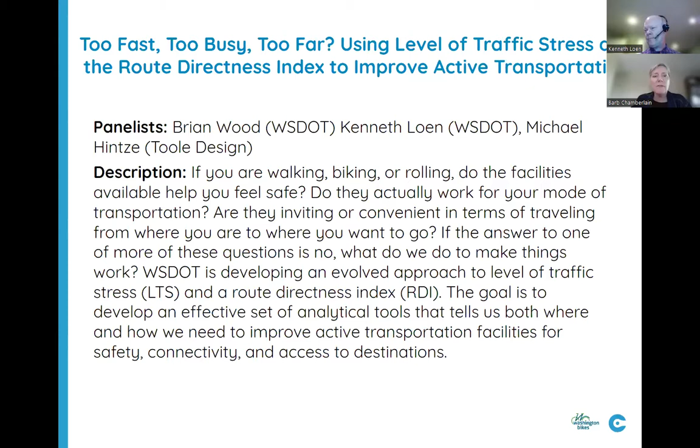In this session, if you are walking, biking, or rolling, do the facilities available help you feel safe? Do they actually work for your mode of transportation? Are they inviting or convenient in terms of traveling from where you are to where you want to go? If the answer to one or more of these questions is no, what do we do to make things work? WSDOT is developing an evolved approach to level of traffic stress, which we abbreviate as LTS, and a route directness index, RDI. The goal is to develop an effective set of analytical tools to tell us both where and how we need to improve active transportation facilities for safety, connectivity, and access to destination.

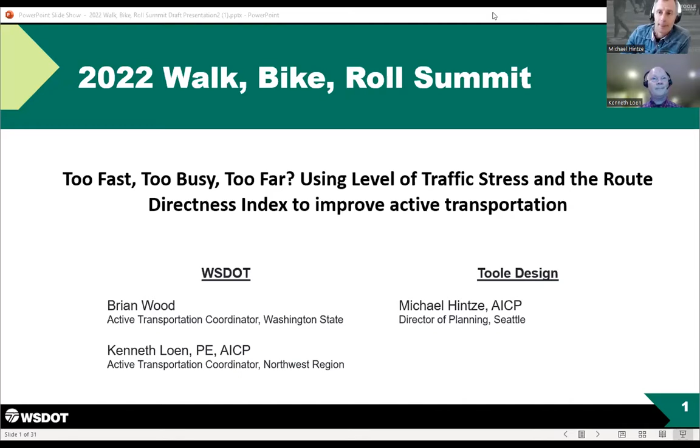So first thing to talk about is why are active transportation analysis tools needed? I know I'm somewhat preaching to the choir with the audience today, but really it boils down to it's all about the network. Any individual's willingness to use a bicycle as transportation is really related to their comfort riding on public routes. Complete routes require complete networks, and we often don't have that, so we need some tool, some method of analyzing what that looks like.

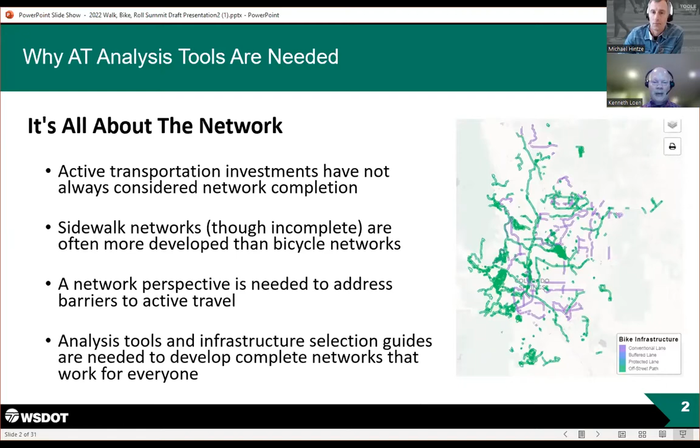Last bullet: analysis tools and infrastructure selection guides are needed to develop complete networks that work for everyone. You don't improve what you don't measure - we all know that. So we need some way to analyze and measure the active transportation networks that we are building.

Another thing to think about when considering what it means to have a complete network: it's not good enough to just look at a map and see what lines connect to other lines. That approach will often leave behind these network gaps.

So just real briefly, I want to talk about why we're thinking about level of traffic stress as an analysis tool, as opposed to other tools. I'm sure most of you, if not all, already are aware of what I'm about to say, but it's worth repeating.

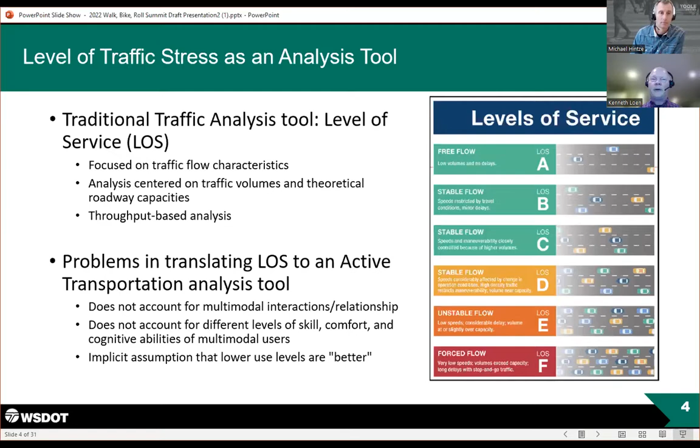Okay, LTS, as I'm sure most of you know, was a concept introduced in 2012 by Peter Furth and others in a report published by the Mineta Transportation Institute. It was intended to be a new way of analyzing bicycle facilities. I want to note that it was originally intended to analyze bicycle facilities specifically, but we'll talk more about that in a little while.

What it was really trying to analyze is the experience of the user and tying that to the quality of the facility being provided, as opposed to thinking about throughput only. So it's really more of a tolerance-based analysis and less of a throughput-based analysis like level of service.

The proposal was for four levels of traffic stress. Level of traffic stress 1 is the lowest level, a facility usable by children up through essentially everyone. Up through level of traffic stress 4, which would be usable by only very few people—realizing this was originally focused on bicycle facilities, this would be a high-speed, high-volume roadway with no bicycle facilities, where the only person who would ride their bike there is someone extremely confident.

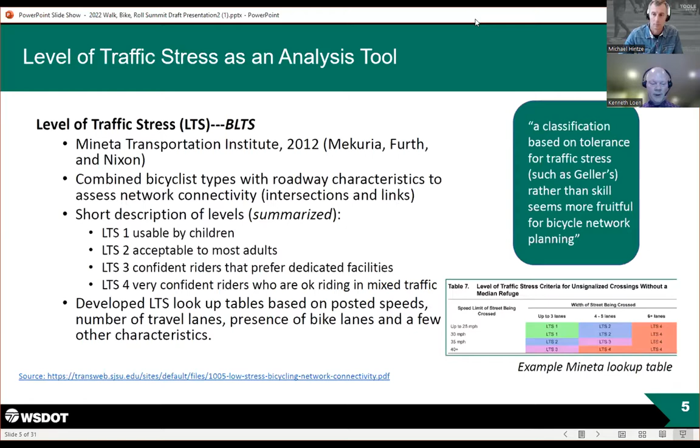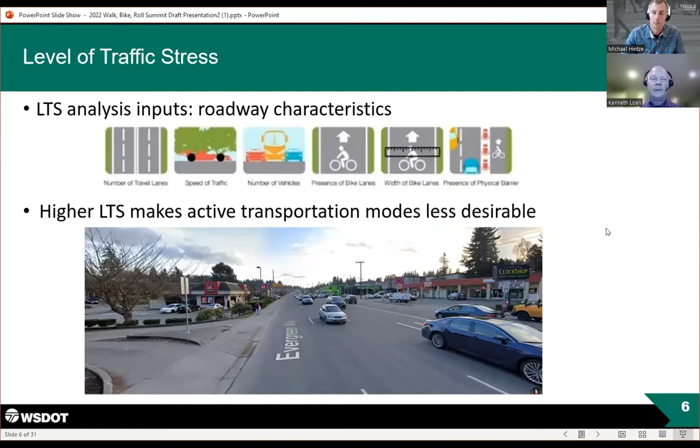Just expounding on that idea a little bit.

Overarching everything we're doing, this all falls under the umbrella of the safe system approach, which I think Michael will touch on a little bit later.

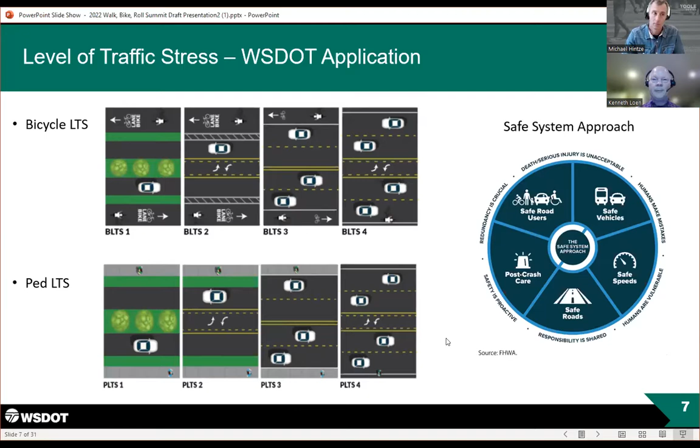I do want to mention, if you haven't read it already, WSDOT's new active transportation plan, as of last year, did introduce the level of traffic stress at the statewide level as a means of evaluating roadways.

The intent for LTS analysis is to replace user count data to guide decisions about transportation facilities. Traditionally, we've tended to look at user counts, so higher user count areas would get facility improvements. Obviously, that is not necessarily the best approach. So now we're looking at the entire network and looking at high LTS locations and how we can address those problems.

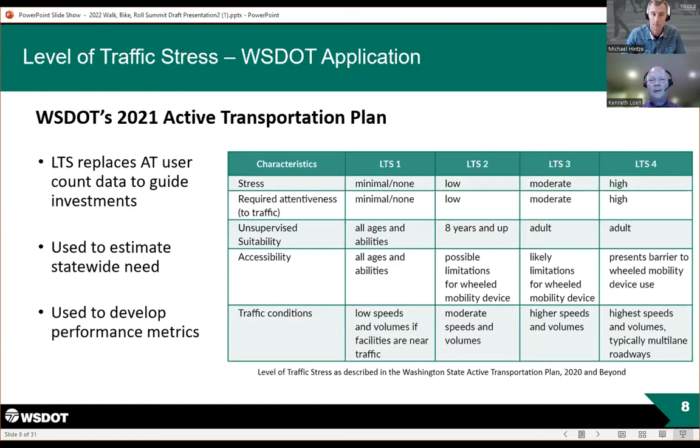LTS analysis is also being developed at the statewide level, so we're looking at the entire system. Brian's going to touch on that a little bit. And our performance metrics and ways of measuring success for our active transportation elements are all tied to the active transportation plan now as well. With that, I'll pass it to Brian.

Thank you, Kenneth. Can everybody hear me okay? Kenneth gave us a nice introduction to LTS, and a second analysis tool WSDOT looked at was route directness. Highways can act as barriers to active travelers, similar to rivers, and crossing locations represent points where the highways are permeable to travel. WSDOT published the multimodal permeability pilot that examined out-of-direction travel, developed route directness index data in GIS, and suggested ways to use RDI data to develop performance metrics.

Like LTS, data limitations were a barrier, but GIS-based route directness has value when asking high-level questions. RDI is a way of comparing the out-of-direction travel for different routes, rather than just comparing the travel distances of those routes. An RDI of 1 means you can walk directly to your destination. An RDI of 2 means it's twice as far as a direct path, which takes twice the time, twice the physical energy, and twice the exposure to weather and other conditions.

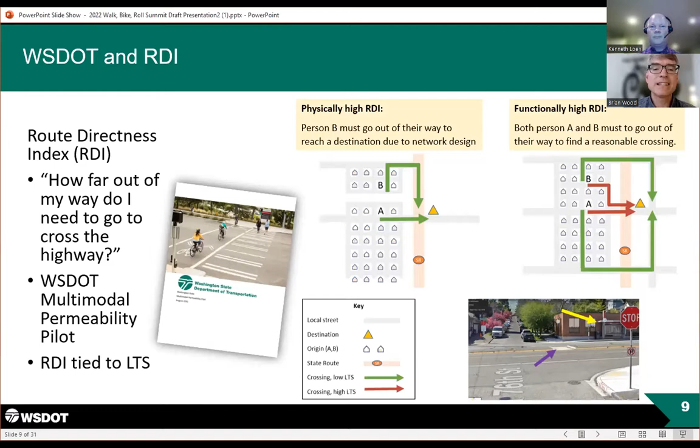These illustrations show that barriers can be physical or functional. In the first illustration, a physically high RDI is shown for traveler B. The second illustration shows a functionally high RDI situation. Neither traveler A nor B has a low level of traffic stress crossing that would enable direct travel via the roadway network. The image shows such a crossing on State Route 99 that leads to a major bus stop. There's a median island which offers some protection for confident pedestrians, but this high-speed, high-volume roadway is not low LTS.

Most people who are familiar with LTS would say it is a GIS tool, and WSDOT has developed state highway LTS layers for GIS, but it's important to recognize that such layers only offer a high-level view of our highways. They are based on very limited data. Such data is valuable when the questions are broad, such as whether we see more crashes in places where the LTS or RDI values are higher.

That kind of information, combined with other data layers, could help us distribute program funding in as equitable a manner as possible. But it won't tell you what to do where, and it won't capture many of the concerns that a walk down the street will reveal. Because of those limitations, WSDOT is trying to develop a manually applied method for capturing LTS and RDI information. Manual methods can see concerning factors such as high volume driveways and large curb radii. They can also see positive factors such as bulb outs and rapid flashing beacons that currently don't show up in GIS data.

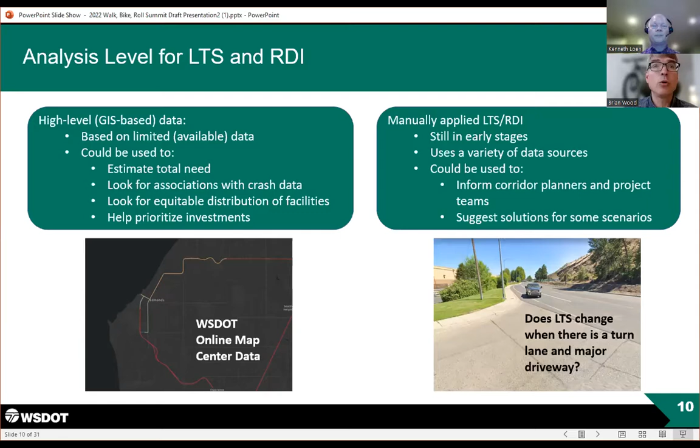A GIS layer titled Active Transportation Data Level of Traffic Stress is now available online through WSDOT's online map center to everybody who wants to go there. The layer is based on the general level of traffic stress lookup table shown on this slide. The layer brings up a map of Washington State where all state highways are color-coded according to LTS. At first, everything appears to be the highest level, LTS 4, color-coded red. But zooming in on a population center, there are some places where the LTS is lower.

One such location in Tacoma is shown on this slide, oriented north on the right. An LTS color key is also provided. In the screenshot, State Route 163 changes from LTS 4 to 3 to 2 and finally to 1 as it goes to the Point Defiance Ferry Terminal.

Clicking on a location on the highway brings up data showing the posted speed, number of travel lanes, traffic volume, general LTS ranking, and then also the bicycle LTS ranking, which might be somewhat different.

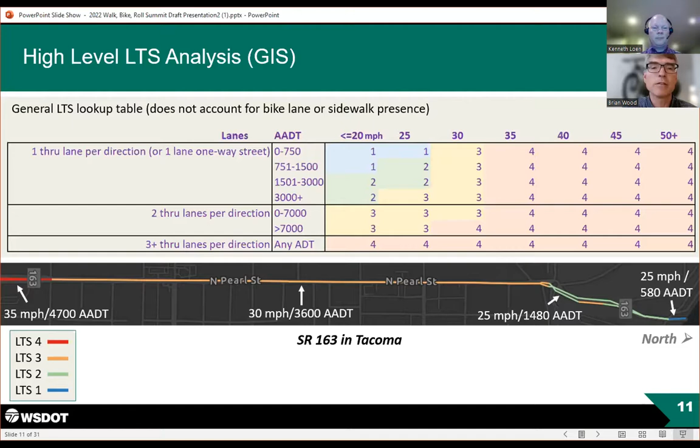Next slide. Let's say we already know we have a crossing concern. Maybe we found it using high-level GIS data, or maybe it comes up in a corridor study. Using the concepts of LTS and RDI, we can begin to paint a picture of a location that is easy to discuss with decision makers or the public.

Actual solutions may be highly location specific, but getting to an acceptable RDI or LTS level can be a matter of policy. Here we see a location in Walla Walla, Plaza Way and State Route 125. I've indicated a potential route from the homes in Rancho Villa to Harvest Smoothies.

In the upper left, you can see the legal pedestrian route that was required until recently. The street level view shows how out of direction the travel task is, and also how high a level of traffic stress the location is. Imagine crossing this in a wheelchair.

Looking at the local roads, it is still over 500 feet from the Plaza Way SR 125 intersection to West Titan Street, where there's a legal crossing that would take you to Harvest Smoothies.

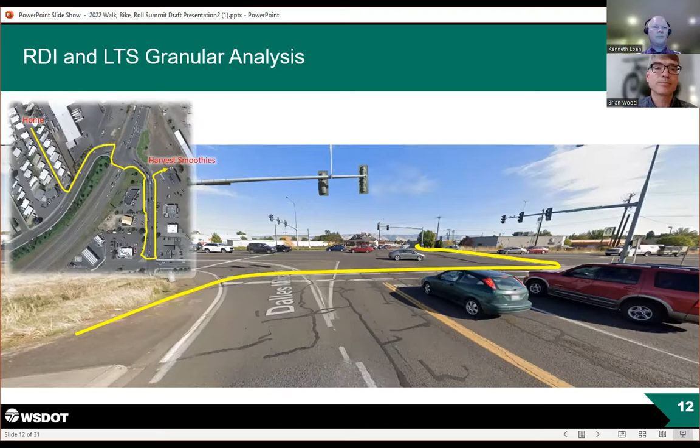Next slide. Fortunately, a new roundabout improvement now provides a direct network route from Rancho Villa to the smoothie shop. And the level of traffic stress will drop from our highest level to one where the safe system approach is observed, and the facilities are ones that most people would be willing to use.

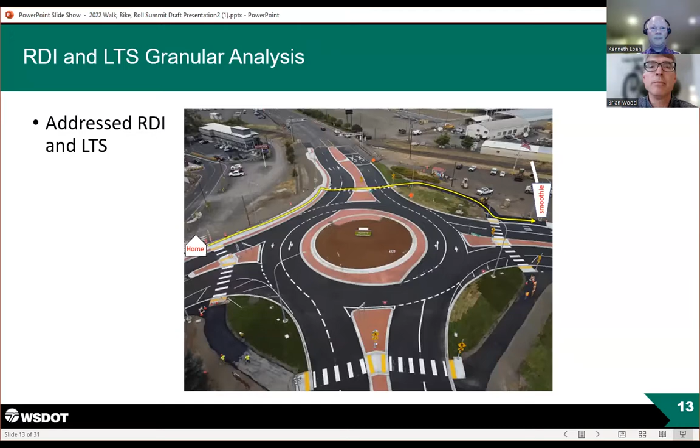This doesn't address all of the RDI issues in this corridor, but if you can only have one crossing, it should definitely be a great one. And that safe system approach, as Kenneth said, is lowering those speeds in many cases. So if there is a mistake made, the person is going to walk away from it.

Next slide. As noted earlier, we are in the early stages of developing a manual process for evaluating a location's LTS and RDI. Such a process can be scalable with different amounts of data looked at for a project, let's say, or a corridor study.

You saw a lookup table used in our GIS analysis of LTS, and tables can be used in a manual process as well, and they can apply to more specific situations.

Manual analysis can consider the effect of a Walmart driveway that sees high activity on a sidewalk path, or a gravel pit that covers bike lanes in loose rocks.

Here we see a wonderful mid-block crossing connected to a trail, with a center protection island and rapid flashing beacon. That certainly impacts LTS and RDI. You might be surprised to find out that WSDOT does not have this mid-block data in a statewide GIS layer that can inform network analysis. You'd have to know it was already there.

LTS and RDI determination and finding solutions that lower the high LTS and RDI values will often require professional judgment. Here, the safe system approach can help by asking, what happens if a crash occurs despite the improvements we thought were a low level of LTS, LTS 2? If the design lowers the speed of impact, it always helps.

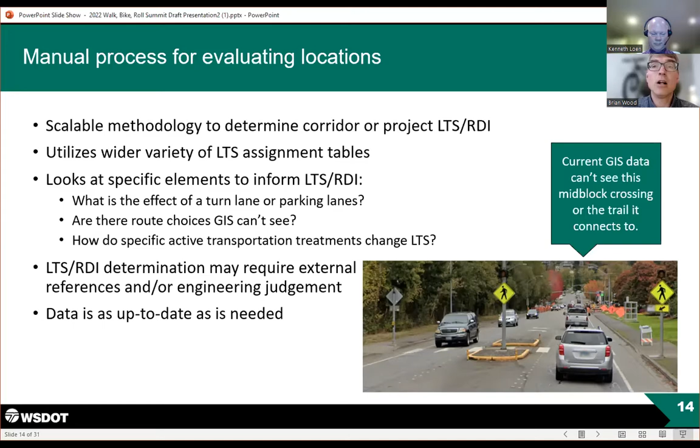Next slide. One tool we have to give us a starting point for manually evaluating LTS is additional lookup tables. Our LTS lookup tables are based on work done by others, such as Mineta Institute in 2012 and Peter Furth in 2017. We also looked at our table values with a safe system approach lens.

The tables shown here and in the following slides are very similar to the ones that inform our GIS layers, but they refer to features we don't have GIS data for. Presumably we will have that data in the future, and it will be a relatively easy task to build new GIS layers from these additional tables.

Here we see tables that consider the effect of sidewalk characteristics on level of traffic stress rankings. Using newly developed sidewalk presence data, we'll be able to use that bottom table on this slide to develop a pedestrian LTS layer for our online GIS map center. But the point here is that a manual evaluation lets us go further. The top table lets us evaluate roads where we know the sidewalk is 6 feet or greater in width.

Where that is true, many of our 35-mile-per-hour roadway segments that were high LTS can be reorganized or recognized as reaching our benchmark of pedestrian level of traffic stress 2. And then you could use them in reverse as well. So if you want level of traffic stress 2 on a 35-mile-an-hour road, make it 6 feet wide.

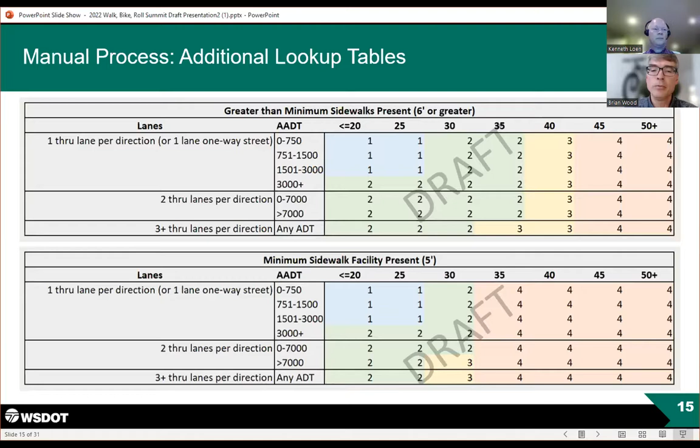Here are two other pedestrian LTS tables that consider sidewalks with buffers and sidewalks with robust physical barriers, like Jersey barriers. With a Jersey barrier in place, one can have their high-speed highway and walk it too. Note that adding a Jersey barrier does not lower the LTS of a road. It mitigates the LTS. This is an important distinction.

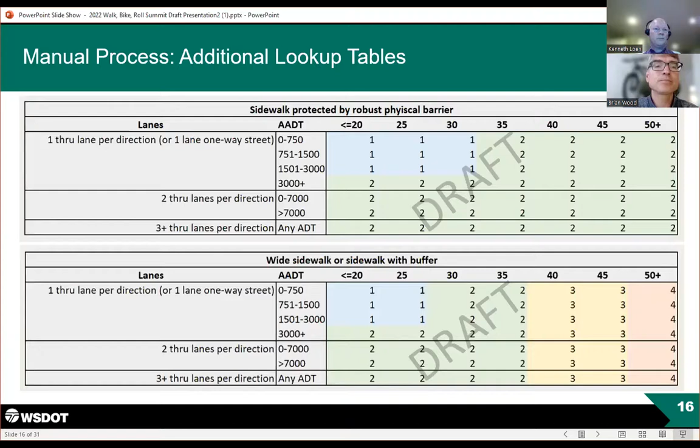In some cases, mitigation is a good choice, such as putting a separated shared use path on SR 520 over Lake Washington. In other cases, there may be a strong case for changing the road to lower LTS, such as where it passes through locations with significant pedestrian demand, and there is a desire to make the environment more walkable. At a low LTS, sidewalks and bike lanes will usually still be important features, but they would require less fortification against traffic.

These tables show increasing protection from motor vehicle traffic. We recognize that a flexible delineator is not going to stop a vehicle from leaving a lane, but it is a much stronger signal to a driver to pay attention to the road, so we consider it to have an effect on LTS.

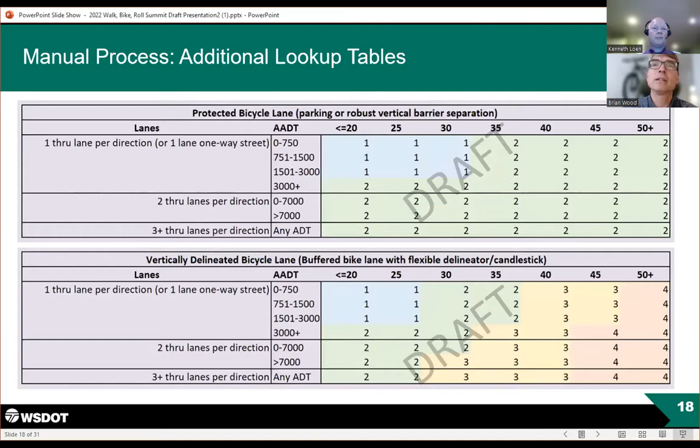WSDOT is currently evaluating the best ways to develop a publicly available, high-level intersection LTS layer for our online map center. Most of the data that would help us are not available statewide, in statewide stewarded data layers though. So a manual method offers more flexibility. But there again, there's this interest in having tables that suggest solutions just as they do for linear facilities.

This is problematic considering the complexity of intersections and the fact that many crossings will require a suite of interventions to qualify as a low level of traffic stress. Signalization could be considered to influence level of traffic stress in that it gives vulnerable users a turn, but we don't have evidence that intersections with signals are always aligned with the safe system approach.

Ramps are especially challenging. This set of screenshots is a small subset of the ramp scenarios that exist in Washington State. Looking at the top left, the Seattle example includes a number of features that may increase vulnerable user exposure or introduce complex movements that raise LTS.

The upper middle picture shows a location in Olympia that is legally usable for bicyclists and pedestrians, but there is significant exposure and no active transportation facilities. The bottom picture is from Walla Walla, where good sidewalks and bike lanes are interrupted at the ramp junction. The roundabout at top right does a good job of managing multiple modes with both facilities and reduced operating speeds that align with the safe system approach.

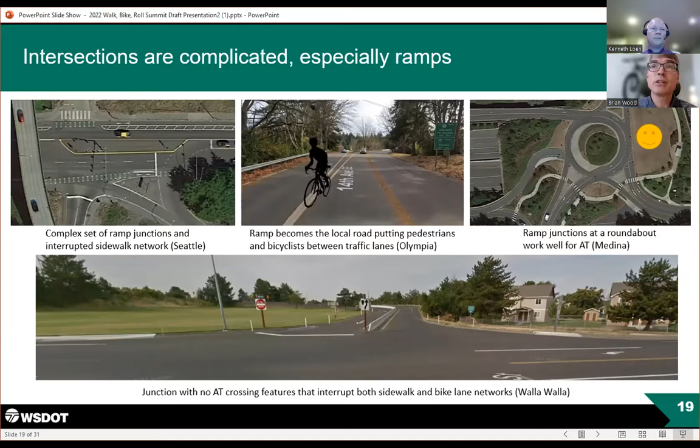This slide outlines possible steps for manually evaluating a corridor in terms of LTS and RDI. I won't go into detail here, but the general idea is to assign LTS values to the various crossings and segments using our lookup tables or other information. Then we need to identify destinations and distances between them that are available, that use available routes and low LTS crossings.

The image shows a segment of State Route 224 in West Richland. There are lots of reasons to cross the highway here. Clearly, young people are using the crossings, and a bicyclist on a sidewalk indicates bicycle LTS is high for the segment. Having some LTS and RDI values to refer to could help when thinking about improvements in this particular situation.

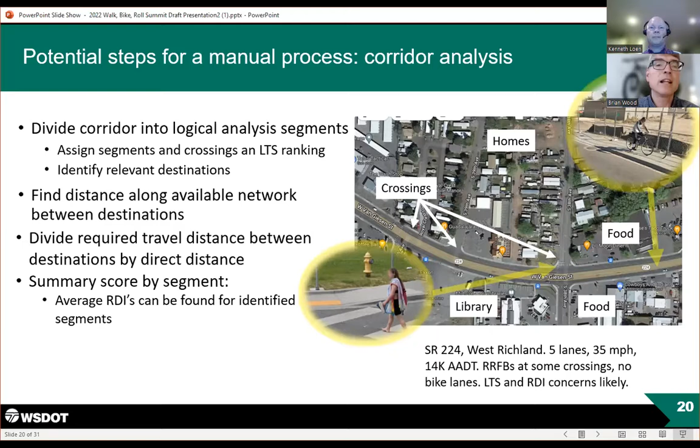This slide illustrates how we can think about solutions to RDI concerns. The red line shows a direct path from origin 3 to destination B, but the high LTS crossing eliminates it as a route choice for most people.

The green line shows a low LTS path from origin 1 to destination A, but the path is very indirect.

RDI issues can be addressed in several ways. Sidewalks or shared use paths can be added to the main corridor so users can reach an existing low LTS crossing. Crossing conditions can be improved where crossings are high LTS. New crossings can be developed at grade or in some cases over or under the highway. New connections such as trails can be added to develop low RDI access to low LTS crossings. Here we propose improving an LTS4 crossing to an LTS2, and/or adding a trail connector that would expand the low LTS network and access an LTS2 crossing.

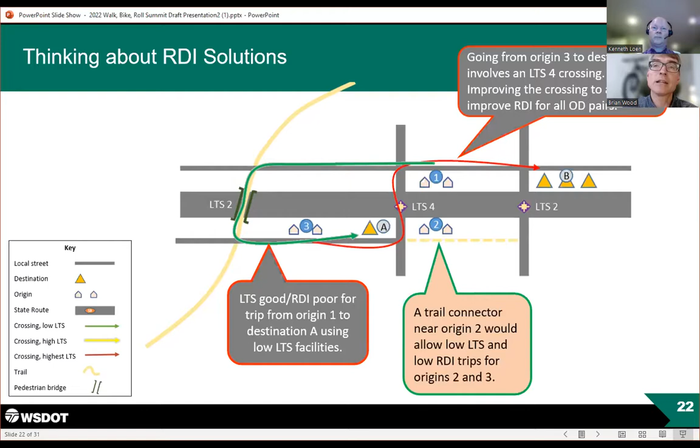This slide shows that in some cases, developing a new crossing is the best solution for addressing poor route directness. Adding a mid-block crossing makes trips between A and B accessible for most people and reduces the likelihood that people will just create their own crossing location to avoid a safer but much more out-of-direction trip.

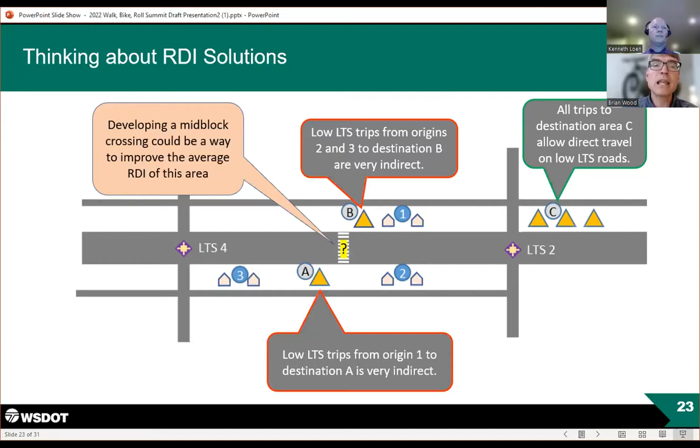So what is missing? Well, the manual process discussed here is in the earliest stages of development, and we need to find funding to take it further. The lookup tables we talked about for sidewalks or bike lanes can be very helpful, but we lack something similar for intersections.

We need easy-to-use solutions guidance that we can point designers to. And we've got the design manual, of course, but we also have many other great guidance tools out there, and they need to be culled and synthesized into a single Washington State guide that is relatively straightforward to use.

And finally, we need to keep working toward a GIS solution that is informed by a comprehensive statewide active transportation data set that is fully stewarded. We should know at a click which intersections have pedestrian protection islands and where we have painted bike boxes.

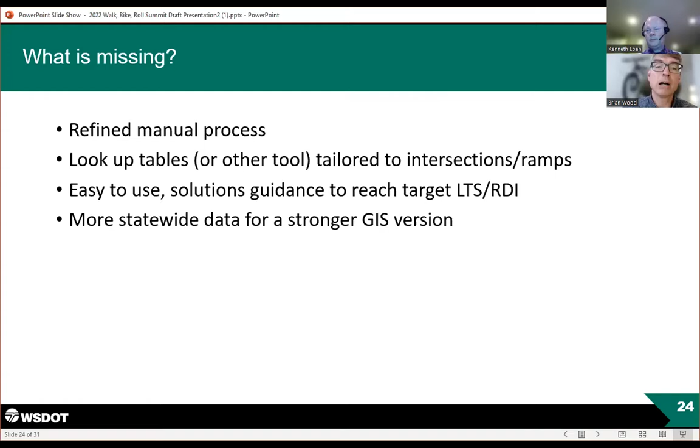Michael will now take the helm and talk more about the pedestrian LTS and solutions available to us.

Great, thank you, Brian. Yeah, so I want to speak more to, as Brian mentioned, much of the data that would be used in a pedestrian level stress analysis just is not yet available at the statewide level.

However, it is often available at the local level. So I wanted to speak to PLTS analysis that we typically do for some of the pedestrian planning work that we do, and some real on-the-ground examples of specific enhancements and countermeasures that can be used to improve people's access to places where they want to go.

As Brian and Kenneth pointed out, you can have a sidewalk network, but oftentimes when it comes to crossing the street, it can be a real challenge. And it also depends on a person's ability to get across the street, and it also happens to be where most of the crashes occur, is at crossings.

The second reason, as I pointed out, is that data is often lacking for analyses that would be used to measure segment-level pedestrian level of traffic stress. I'd say this is changing a bit with newer tools and services being used to collect data at scale on things like sidewalk presence, sidewalk condition, presence of buffers, and things like that. But for now, it can be challenging to have that kind of data, and agencies typically don't have great data sources at the segment level.

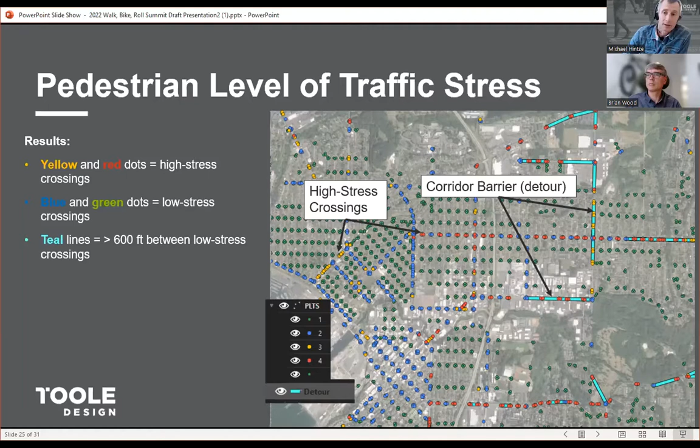Next slide, Kenneth. So once we've identified those segments where there's a need for a high comfort crossing, we look closer to understand what the land uses are, what the destinations are in those areas that people might want to get to.

And hone in on specific locations where it makes sense to install a new crossing. So we look at where schools are, parks, other community destinations, and that might help inform where you're going to install a higher comfort crossing. In this case, a 5-lane arterial, 35 miles per hour.

There are a number of enhancements that could be put in place to lower the stress of the crossing and improve safety. Here's just a few: installing a crosswalk, but enhancing that with some kind of signal. A hybrid beacon would probably be appropriate here, given the speed, volumes, and configuration of the roadway.

But a question we always start with, and I'll talk about this more in a bit, and I think Brian referred to this as well, is a safe system approach. So really looking at the entire corridor and asking: can this roadway be rechannelized? Can lanes be reduced, which would shorten crossings for pedestrians, provide speed management benefits, and proven safety benefits? Lots of studies have been done on that. So we'd start with that question.

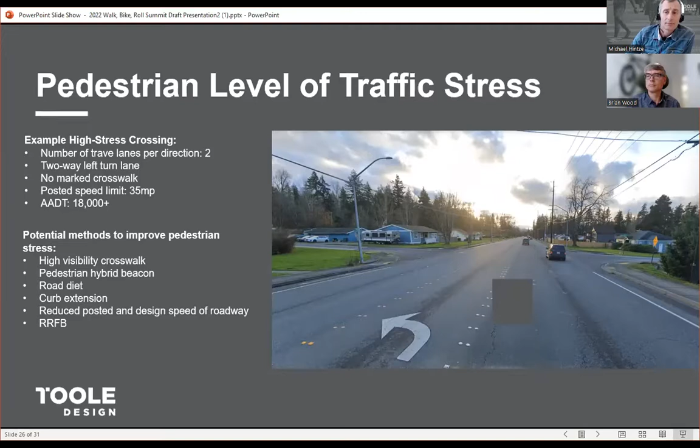Next slide. So a bit more on the safe system approach. I'm sure many of you are familiar with the term and concept, but generally it recognizes that vehicle size and a driver's operating speed, coupled with roadway design, are factors that determine the most effective methods to reduce crash potential. So many safe system improvements focus on vulnerable road users, such as pedestrians and bicyclists.

The good news is that designing to reduce exposure to potentially fatal crashes for the most vulnerable road users is a proven and effective strategy to achieve better outcomes for all users, motorists and motorcyclists included. This represents a shift to focus on the most effective countermeasures to reduce crash exposure for everyone, an evolution from a system oriented primarily around modes or specific types of users in a given situation.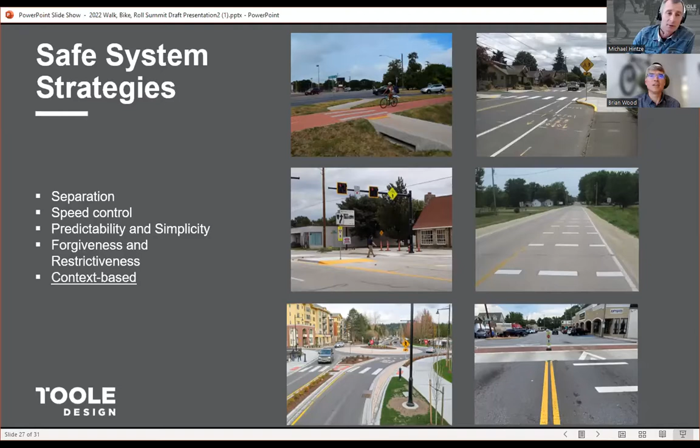I'll just go through a couple examples here. If you go to the next slide, this is a state highway, Eastern Washington, and it is 35 mph posted speed, and this happens to be a school crossing. There are other pedestrian activity generators in the vicinity, and so the first thing you might try to do in this situation is lower the speed. And there are examples of state routes in this type of context where the speed's been reduced to 25 miles an hour.

But obviously there's a need for both physical and non-physical measures to really physically enforce that speed. So some of those might be the speed reduction markings, speed feedback signs, putting in high visibility signal like an RRFB, and then also physically or visually narrowing the roadway. So there could be an opportunity in a situation to potentially widen the roadway in a short segment and put in a refuge island in the middle, which can serve as both horizontal deflection and to kind of visually constrict the roadway as well.

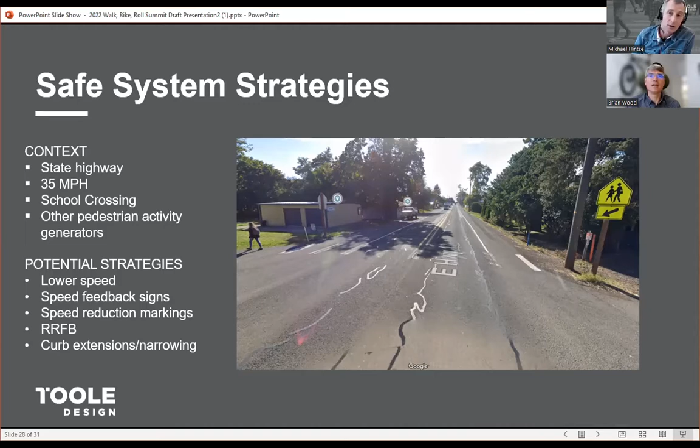Next slide is another example. This is more of a Main Street example, another community in Eastern Washington where in this case, the speed was lowered to 25 mph, but no real physical changes were made. And on either side of this downtown segment, there are bike lanes, but they were dropped in favor of maintaining or providing on-street parking. So this appears to be a natural candidate for a rechannelization, typical 4 to 3 lane conversion, which would allow you to do a lot of things to improve the LTS for pedestrians and bicyclists, and generally contribute to a more vibrant downtown.

So yeah, if you were to do that, you could continue those bike lanes. You'd obviously be able to narrow the crossings, install curb extensions, possibly even install a landscape median, and then greatly improve the existing pedestrian crossings, which you can see in that smaller image. They're just unsigned, high visibility marked crossings, so you're asked to cross 4 lanes of traffic in that situation without any other enhancements. So a lot of opportunities in this situation.

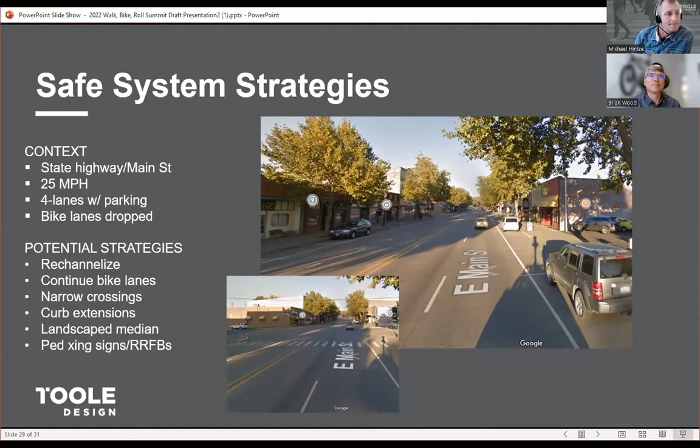I think I have one last slide. Brian mentioned that WSDOT is feverishly working on and looking for resources to develop its own guidance around pedestrian level traffic stress, and just to provide designers the strategies that are really geared towards the Washington context.

So in the meantime, there are a lot of great resources out there that people should be referencing. I think worth a mention is the State Strategic Highway Safety Plan, which provides a great framework for applying the safe system approach in Washington State. It's a good place to start to familiarize yourself with that approach.

Of course, Googling safe system will return a lot of hits from FHWA on the safe system and the various strategies for that. And speaking of FHWA, just searching proven safety countermeasures, you'll come to a page where you'll find a summary of a growing list of safety countermeasures that are proven.

And I think that count is now up to 28 countermeasures. Each one of these, they provide a summary of the countermeasure, where it's appropriate, and resources for more information, including the crash modification clearinghouse, which really is a clearinghouse for research-based studies on each of these countermeasures.

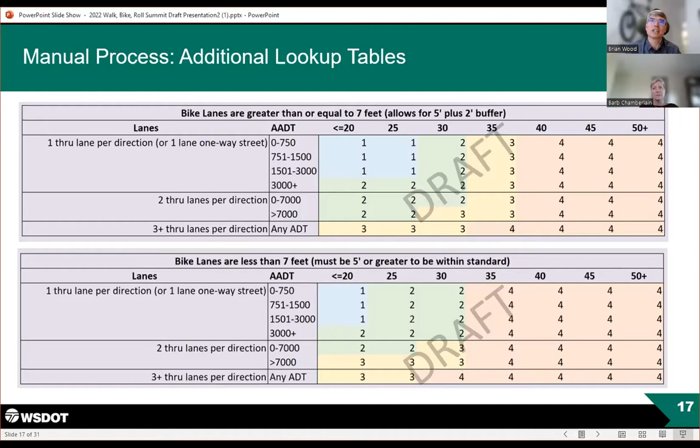So I would say it was a little easier to do that with linear facilities than it is with intersections. Once you get to the crossing, you still got to get across that multi-lane high-speed road, and we're working on that piece feverishly. But I also want everybody to understand that it isn't just as simple as, okay, you built the bike lane, and so everything's fine now.

You come to that Walmart intersection - it's not an intersection, I said intersection, it isn't an intersection, it's a driveway. It's just an ordinary driveway, but it feels like crossing a huge intersection without actual traffic controls. And so the bicyclist or the pedestrian goes, how do I get across this? There's cars going in and out, and turn radii that make it happen all fast, and turn lanes. So we have a lot of work to do, and that's kind of where that manual piece comes in.

What happens then when you walk down that road? Sure, put in the bike lanes, but what else do you need to do?

Yeah, sure. So that distance is kind of the average block length in an urban suburban context. So that's kind of a starting point.